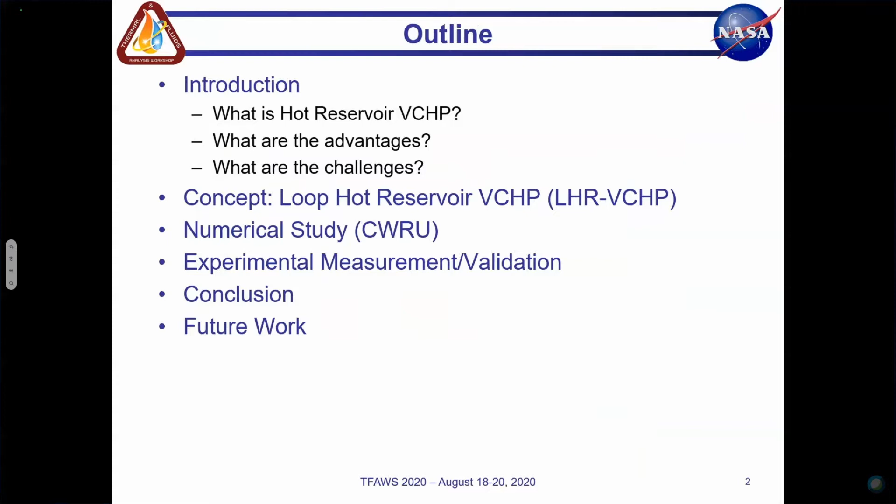I will talk about the concept and the physics behind this. Then I will talk about the feasibility study performed in Phase 1, including the numerical model developed by Case Western Reserve University and the experimental validation performed by ACT. After that, I will make some conclusions and talk about the work plan for Phase 2.

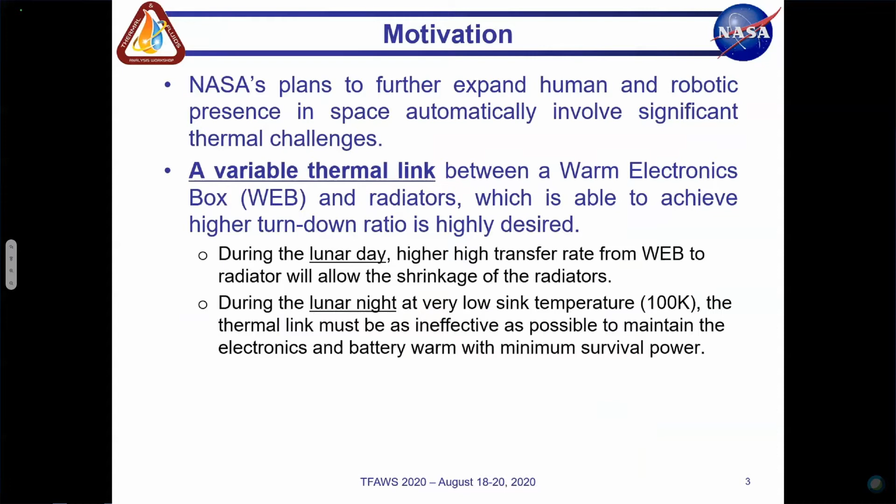The motivation behind hot reservoir VCHP is to develop a variable thermal link connecting the payload and the radiator for lunar missions. We want this thermal link's conductivity to be as high as possible during the lunar day so that the radiator panel size can be minimized. During the lunar night, we want this thermal link to be very insulated so that the payload temperature can be maintained warm using a very small amount of survival power.

Variable conductance heat pipe seems to be a very good option for this kind of application. Basically, it's a heat pipe charged with non-condensable gas, and because of pressure balance between vapor and NCG, the active area or active length of the condenser will change according to different heat load and sink temperature. When the sink temperature drops, the NCG will expand and cover the condenser area, and the evaporator temperature can be maintained at a higher level.

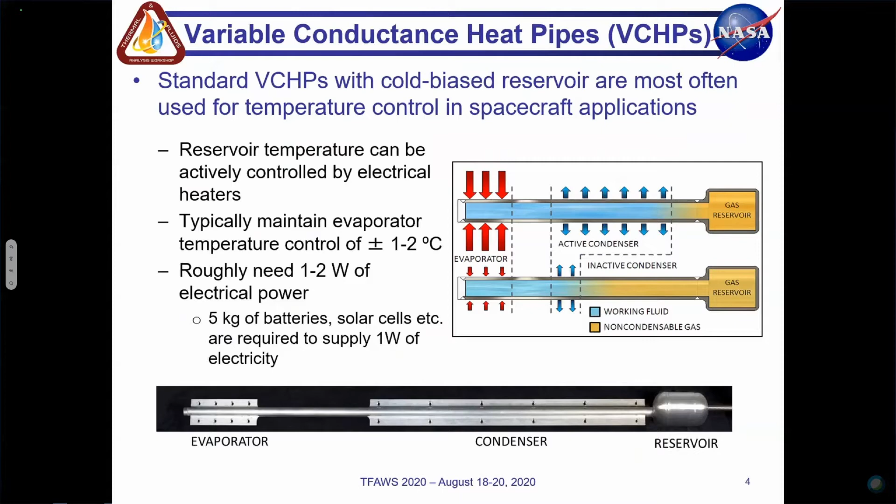The picture showing here is the standard VCHP with a reservoir attached at the end of the condenser. We call it cold reservoir. For this cold reservoir to maintain the evaporator temperature within 1 or 2 degrees, we will need some electrical power, 1 or 2 watts, to heat up the reservoir during 14 days of lunar night. To supply this 1 watt of electricity will give you an additional 5 kilograms of weight penalty.

So that's the reason we like to go to hot reservoir. The main difference between hot reservoir and cold reservoir is that in hot reservoir VCHP, you have a reservoir attached upstream of the evaporator, and the temperature of the reservoir will basically follow the payload temperature, in other words, the heat source temperature instead of the sink temperature.

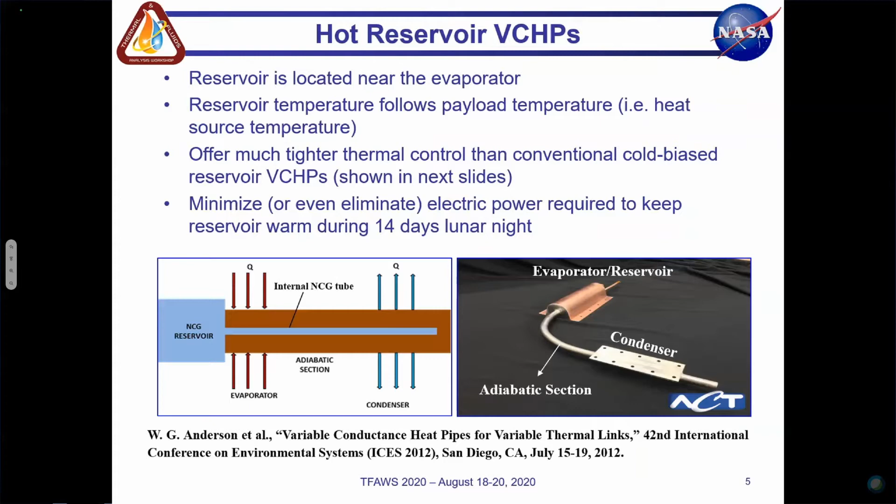This offers much tighter thermal control capability than the traditional cold reservoir VCHP, which I will show in the next slides. You can also use the payload waste heat to maintain the temperature of the reservoir during the lunar night, so you can eliminate that additional 1 or 2 watts of survival power, further reducing the mass of the system.

This is an example of how good this thermal control capability of hot reservoir VCHP is. For the standard condition, this VCHP is rejecting 50 watts of heat to a 50 degrees C sink temperature, and the evaporator temperature shown on top of this figure is around 70 degrees. We start decreasing the heat load from 67 watts all the way to 11 watts, and we also decrease the sink temperature from 50 degrees C to -20, going into the survival mode, as shown here.

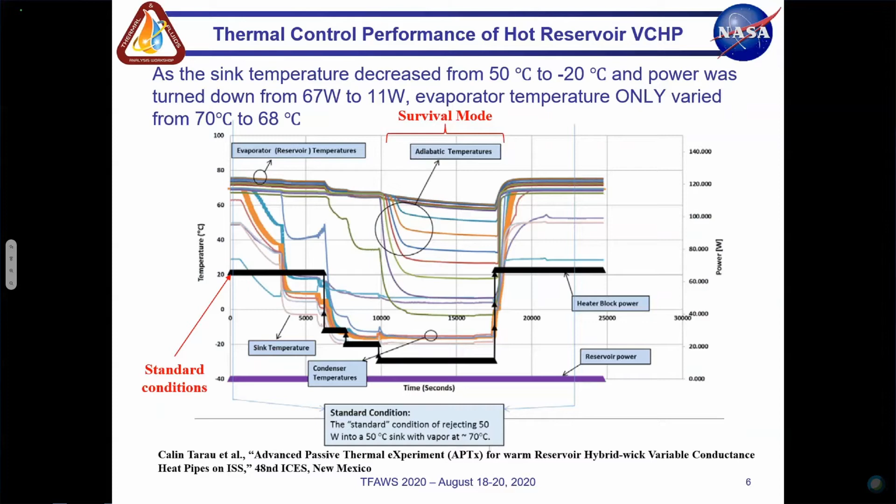The evaporator temperature only drops by 2 degrees, so the turndown ratio for this hot reservoir VCHP is about 150. This shows that this is a very good device for thermal link, but there's a challenge associated with fluid management.

In 2017, we tested a hot reservoir VCHP on the ISS as part of APTX with Marshall, and the result showed that the temperature of the vapor became very hot, higher than what we expected. The reason is we found vapor actually present in the hot reservoir, pushing all the non-condensable gas out from the reservoir and into the heat pipe volume.

After we identified this problem, we started purging—removing the moisture from the reservoir by electrically heating it. We found this is a really long process, and we had to shut down the experiment at the end of the flight. Based on this past ISS test experience, we learned that fluid management is a very important area to improve for the hot reservoir VCHP to be applicable for space applications.

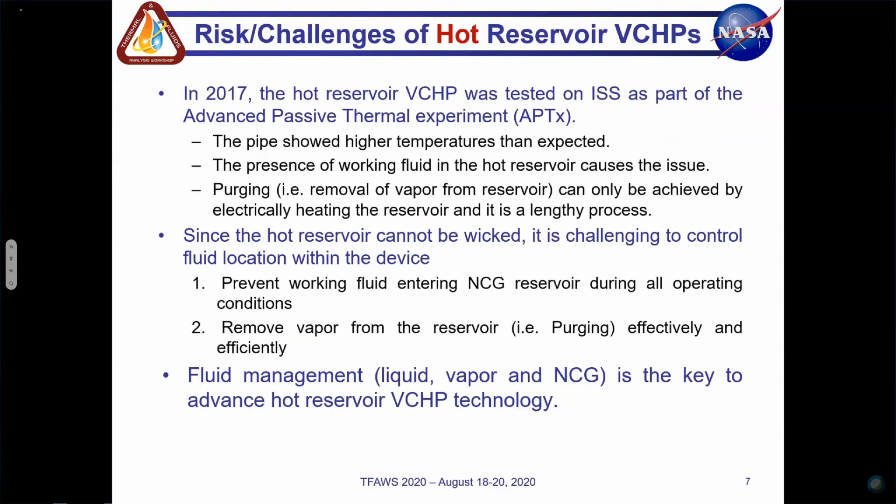This can be divided into two aspects. One, we need to prevent working fluid from entering the reservoir during operation, startup, or any operation in space. Second, if fluid accidentally gets into the reservoir, can we find a way to remove the vapor effectively and efficiently?

This is not easy to do for a hot reservoir because the reservoir cannot be wicked—you cannot put a wick structure in the reservoir. And purging is really a challenge.

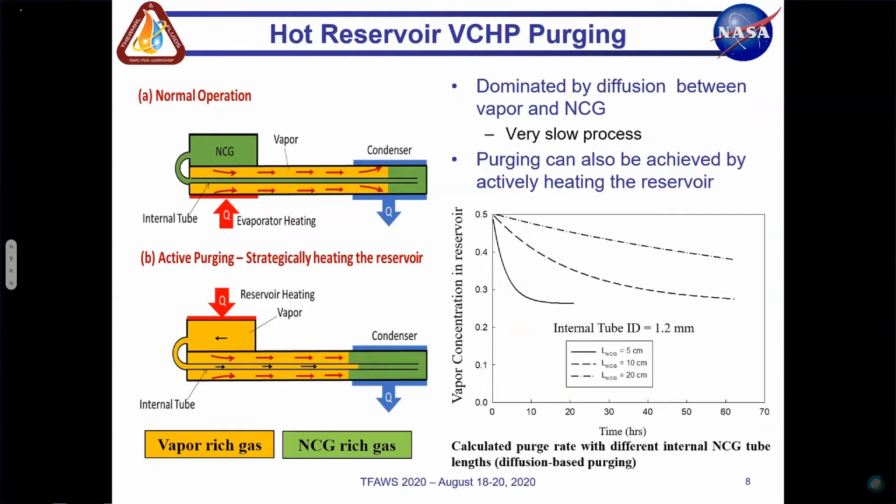As shown here, this is the model developed by Case Western Reserve University, giving an estimated time for purging. If you want to remove the vapor from the reservoir, reducing the moisture level from 50% to 30% by diffusion only, it will take hours or even days to complete. Because there's no other way to remove vapor, it's dominated by the diffusion of two species, so we have to figure out another way to provide a good purging process.

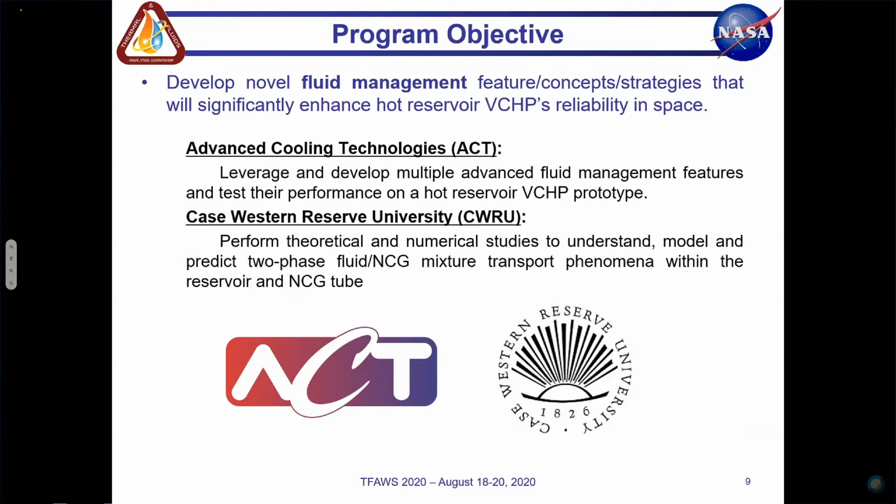This is the objective of this STTR program: to develop innovative fluid management features, concepts, or strategies that can improve the reliability of hot reservoir VCHP so it can be used in space for a long period of time. Case Western Reserve University is our academic partner, and their support is on the modeling side.

The solution we came up with during the Phase 1 program is called the Loop Hot Reservoir VCHP, as the schematic shows in these slides. The idea is adding another NCG tube connecting between the condenser and the reservoir.

Forming a loop for fluid flow, in this configuration we should be able to use the momentum of the primary flow in the heat pipe section to transfer through shearing and induce another flow circulating along the loop in a favorable direction—in other words, a counterclockwise direction as shown in these slides. If we can generate this kind of flow, it will continuously remove moisture from the reservoir.

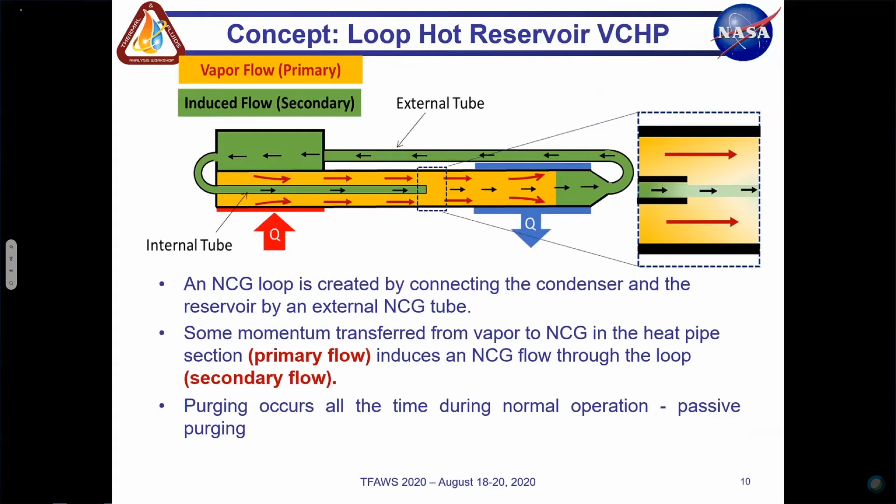Without using additional power, we don't need an additional heating element to heat up the reservoir for purging, and purging will be happening during the entire mission. We call it the passive purging concept. So this is the idea of the loop hot reservoir VCHP.

In the Phase 1 program, we tried to demonstrate this idea through both numerical modeling and experimental measurement. For the numerical model, this was done by Case Western Reserve University—they developed a CFD-based model to study the complex fluid or transport phenomena within that configuration.

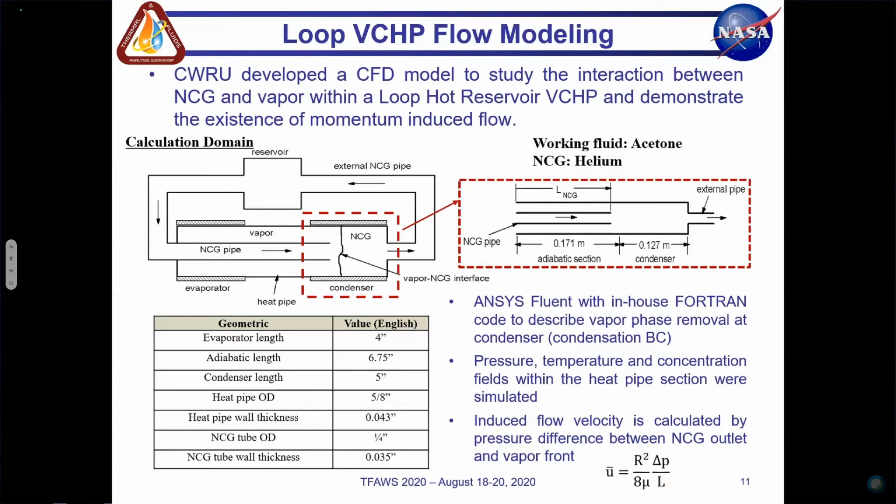The calculation domain is shown in this slide. It has two regions: one is the heat pipe region, the other is the external NCG tube length. The model was run by ANSYS using an in-house Fortran code to assign boundary conditions in the heat pipe section. Using their model, they can calculate the pressure, temperature, and concentration of two species within the heat pipe section, and using that pressure distribution, they can also calculate the induced flow within the external loop.

So here just shows some example of what they calculate. The figure on the left is the pressure distribution within the heat pipe section at the end of condenser. The figure on the right is the velocity profile within the heat pipe section.

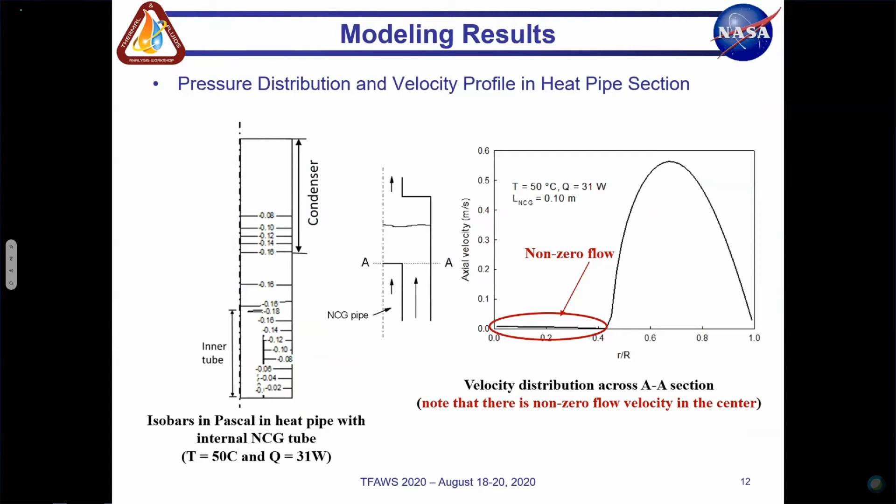As you can see, there's a non-zero flow actually at the outlet of the NCG tube, showing that a flow can actually be induced by this momentum transfer concept.

Figure on this slide shows some parametric study performed by the CFD model. Figure A shows the influence of the length of an NCG tube in the heat pipe section. When the NCG tube increases and goes into the condenser, the induced flow velocity will decay.

Figure B actually shows the relationship between the power and the momentum induced flow in the loop - it increases as the power increases. So their conclusion from the CFD analysis is that it is possible to generate non-condensable flow within the loop VCHP by momentum.

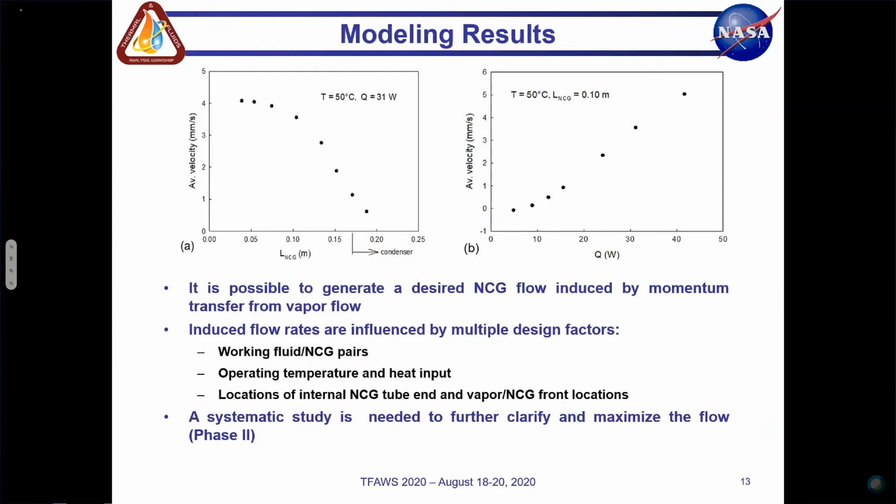But there are multiple design factors need to be considered to obtain the flow, including working fluid and NCG pair, the thermophysical property of their selection, and the power and operating temperature of the heat pipe. As I said, the location of internal NCG tube length is very important, and the relationship between the NCG tube outlet and the vapor NCG front location.

So in phase 2, we will do a more detailed systematic study to maximize the flow.

So in parallel, ACT tried to demonstrate the concept from the experimental side, and we came up with an experimental setup like this to capture or detect the flow generated by the momentum of the primary vapor.

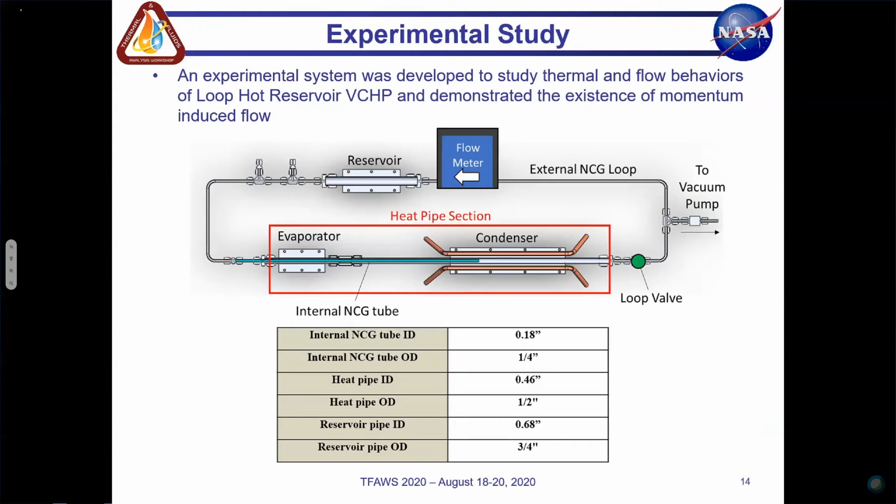As you can see, we use a flow meter connected in the external loop to capture whatever happens inside this loop and see whether we can capture the flow.

So before we do the flow measurement, first we want to validate that adding an additional NCG tube at the end of the condenser will not compromise the thermal control capability of the hot reservoir VCHP.

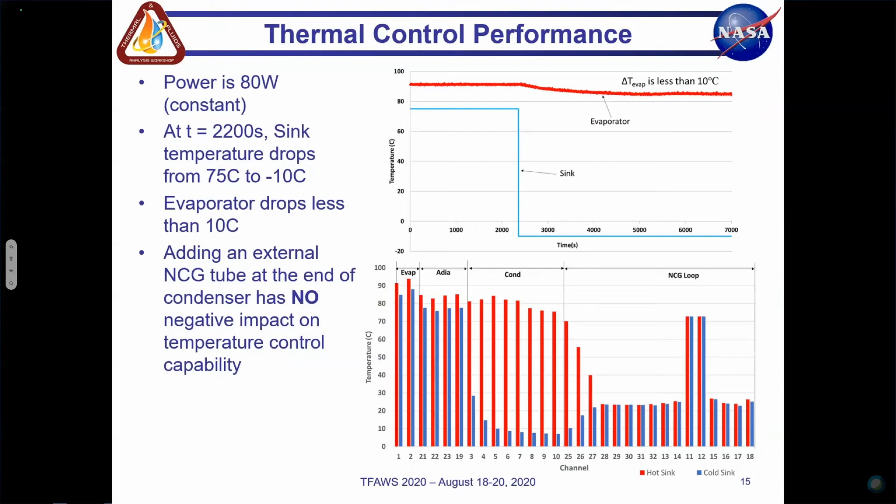So this is the test result we did. The power was 80 watts constant during the testing. At 2200 seconds, we suddenly dropped the sink temperature from 75 degrees to minus 10 degrees, and the evaporator temperature only decayed by 10 degrees. So this shows that we still have a very good thermal control capability with the loop configuration.

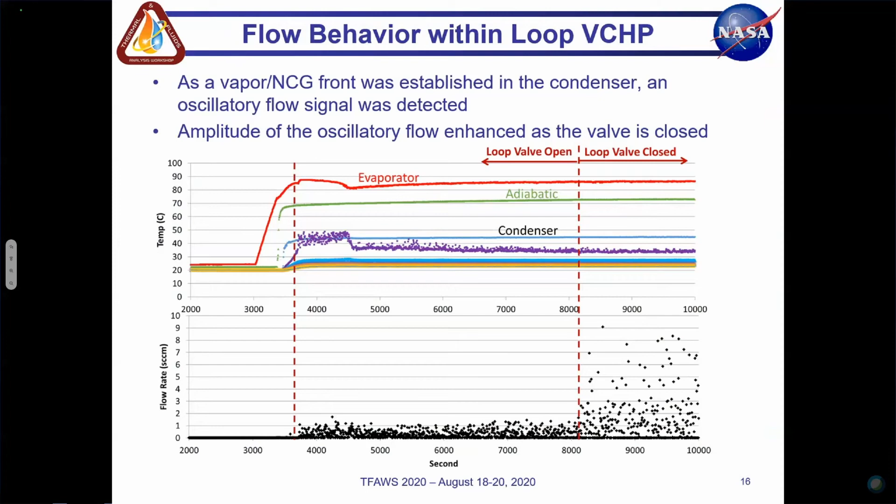And when the valve is closed - we have a valve in the loop - when we close the valve, the oscillation amplitude becomes larger because the pressure wave actually propagates in just one direction, and the gas flow meter will experience the full amplitude of the pressure wave. So this is not good for us.

What we want to see is a continuous induced flow, which could be embedded within this oscillatory flow - we call it the AC component. So in order to minimize the effect of that oscillation within the measurement, we need to minimize our fluid charge.

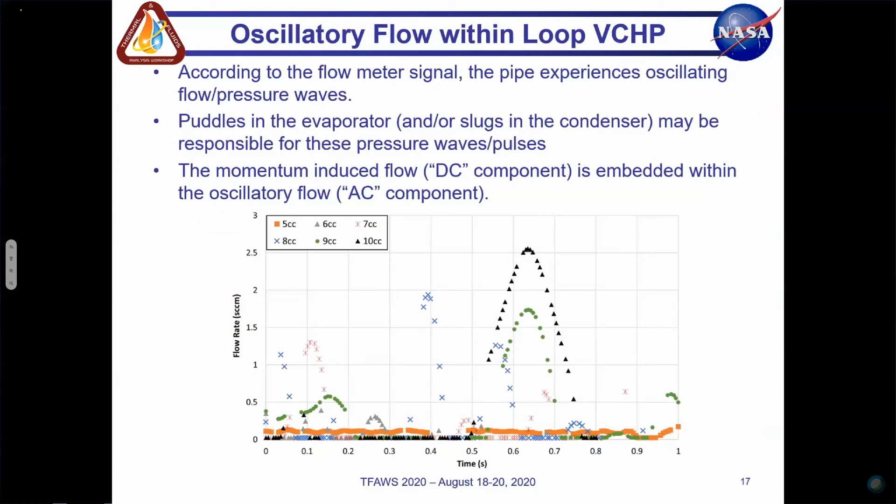This is the data, the flow data captured with different fluid charges. As you can see, when we reduce the amount of working fluid, the amplitude of that oscillation decays significantly. So by this way, we should be able to see the DC flow. This slide shows the DC flow captured by the flow meter when you increase the heat input.

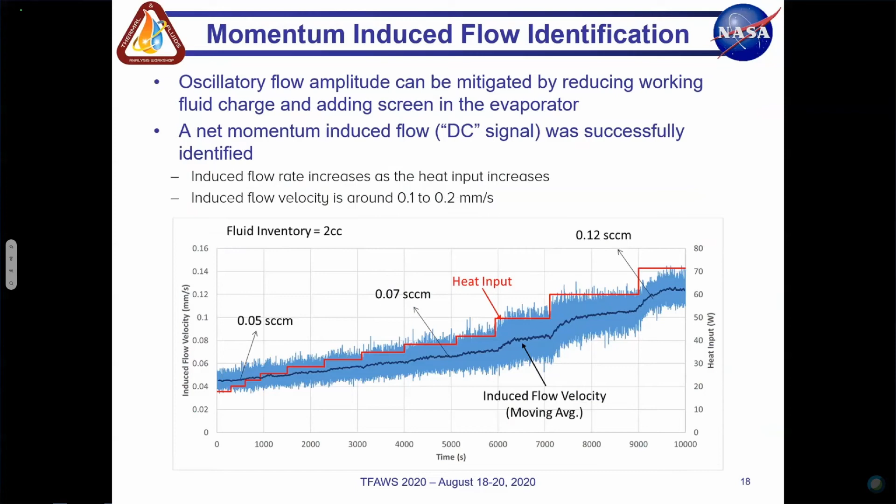The red line is the power input, and the blue line is the flow signal, with the darker one being the moving average. You can see there's a clear relationship between the power and the induced flow, which is small but should be dominating the diffusion purging process.

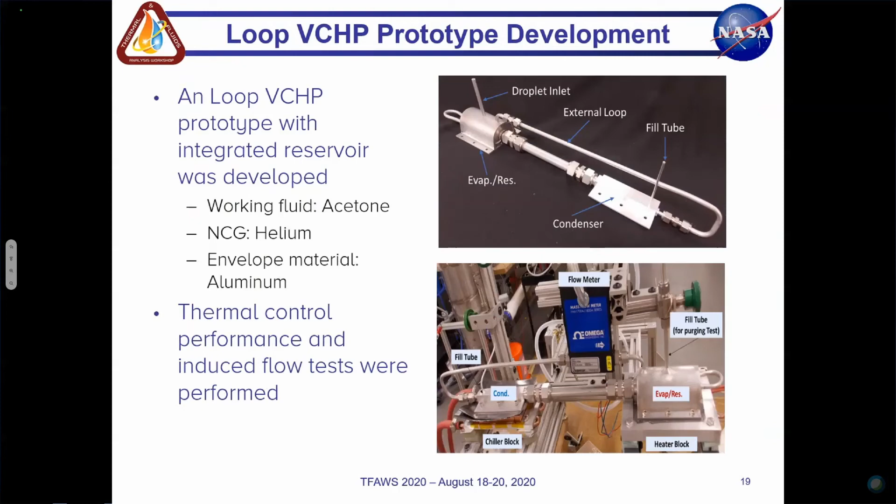After we demonstrated that flow can be generated by the momentum, we started developing a prototype using this concept. This prototype has a reservoir integrated with an evaporator, just like what we did for the ISS test, and we also use a flow meter to capture the flow.

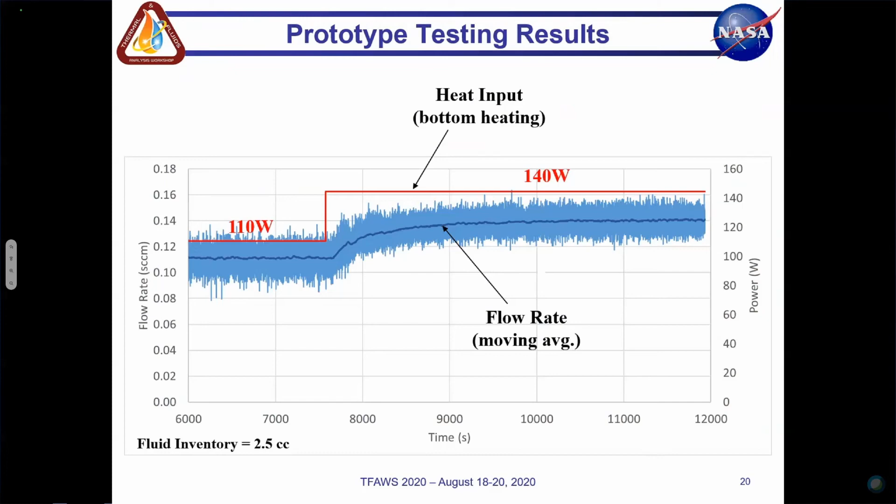This is the test result with the prototype about the flow. At different power levels, we can see the flow actually increase. So the next step for this program is to identify how we can increase the flow, and what is the relationship between the flow and the purging.

The key takeaway of today's presentation is that hot reservoir VCHP is a very good variable thermal link for planetary landers compared with cold reservoir, because it can provide much tighter thermal control capability. But there's a significant challenge to design hot reservoir, especially the fluid management side.

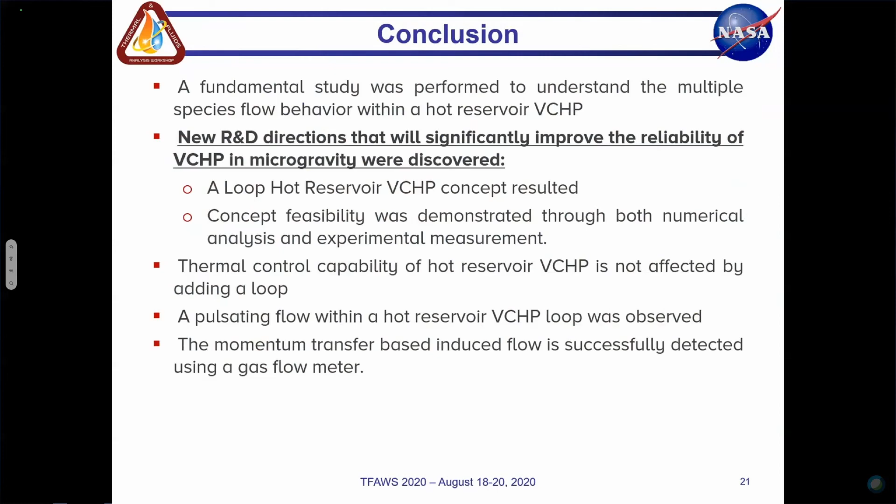In this phase one, we developed an idea using the loop to generate a momentum that can help purging. This concept was demonstrated through both numerical model and experimental validation. We also identified that the flow behavior within the loop VCHP is actually pulsating - maybe we can use those pulses to further increase the flow.

That will be some work performed in phase two. So the future work for phase one into phase two is to further study the flow, master the flow, and maximize the flow within the loop VCHP, and use that flow to significantly increase the purging rate.

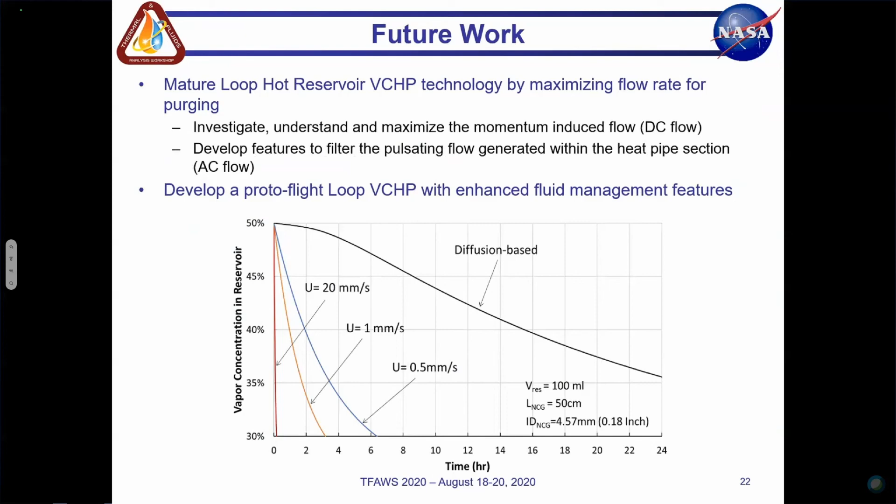This is the prediction comparison between diffusion-based purging and convective-based purging. If you want to reduce the vapor concentration in the reservoir from 50% to 35%, relying only on diffusion, it will take 24 hours. But if it can generate a small amount of flow, like 0.5 millimeter per second, the time for purging will significantly shorten.

So this is our goal: we want to increase the flow and maximize the purging rate, minimizing the time for purging.